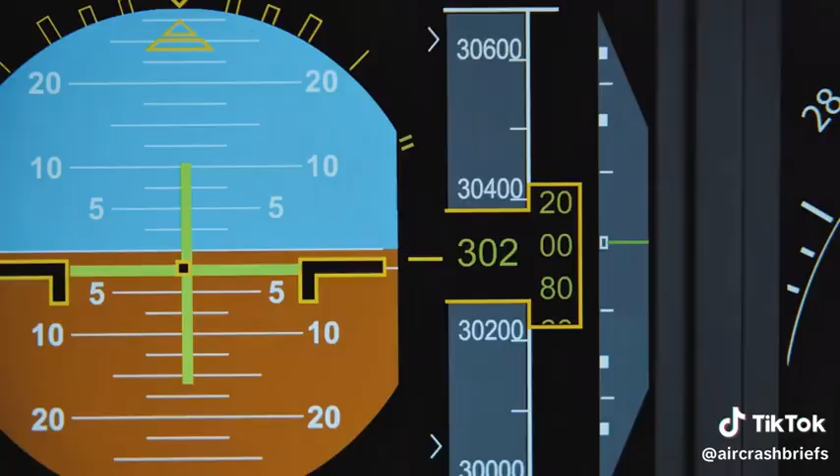The Airbus A330 is powered by two Rolls-Royce Trent 700 engines. Every aspect of flight operation is aided by advanced computers. 165 miles from Hong Kong Airport, the Airbus leaves cruising altitude and begins its descent. The aircraft is performing perfectly, and then something goes wrong. What the hell was that?

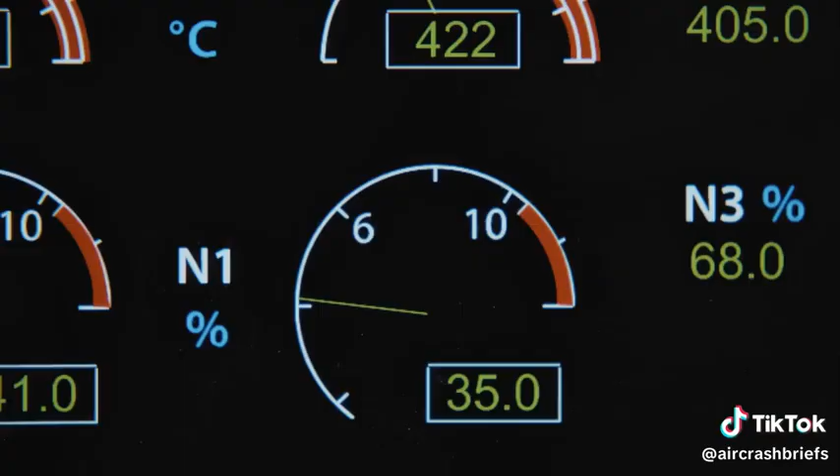The flight computer alerts the pilots to a problem. Engine 2 stalled. Plane's monitoring system indicates there's an issue with the right engine, engine number 2. Captain Waters reduces power on the engine to idle to protect it from damage, the lowest possible level while still keeping it running. It has an immediate effect. The engine noises disappear. Without thrust from the right engine, the pilots are now relying exclusively on the left engine to get them to Hong Kong.

But as the flight crew prepares for landing, the left engine, engine number 1, also fails. Engine 1 stalled. Both engines are now still running, but producing no thrust. The plane is gliding. Without thrust, they won't make it to Hong Kong or any other airport. Despite several attempts, the pilots cannot get the engines to produce power. The pilots confront the grim prospect of ditching in the South China Sea. I'm calling a mayday. Do it. First Officer Hayhoe begins preparing to ditch the plane.

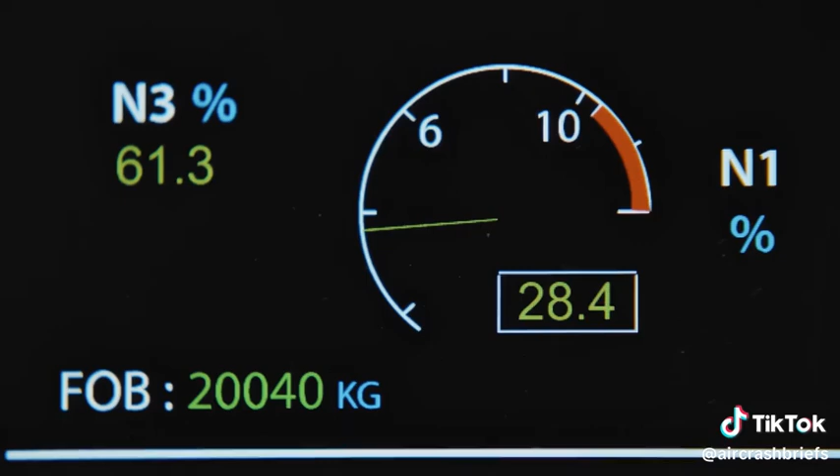Then Captain Waters gets an idea. Okay. Try slow movements. Go slowly. Just ease in fuel. Easy does it. Incredibly, it seems to be having an effect. Rotation increasing in engine 1. Captain Waters realizes that the engine won't go any higher than 74% power. With one engine working, the pilots can now attempt a landing at Hong Kong Airport. But there's no margin for error. Okay, flaps 1. Gear down. Gear down.

The safest plan is to get the plane 5,500 feet from the ground, then pull engine 1 back to idle, reducing speed and altitude, in preparation for a gentle glide onto the runway. But just 1 minute from touchdown, it's overspeed, an overspeed warning sounds, a signal the aircraft is flying too fast. They should be slowing down. Engine 1 is still running at high speed, too high to land safely. The pilots have no choice but to risk a high-speed landing on a runway at the edge of the ocean.

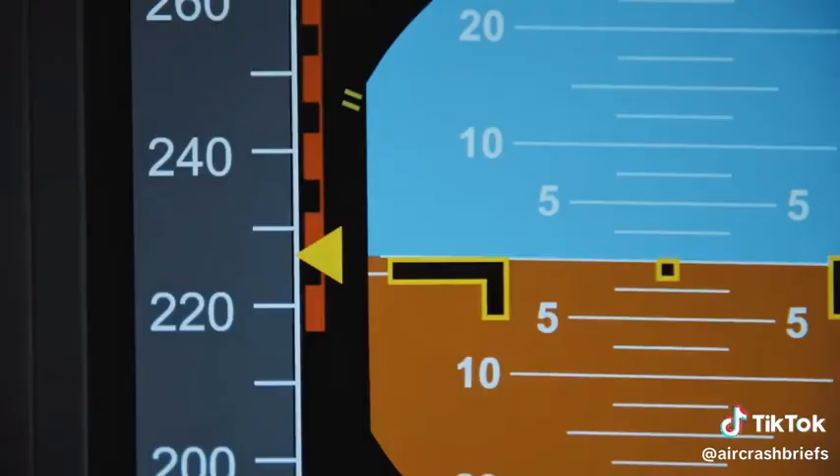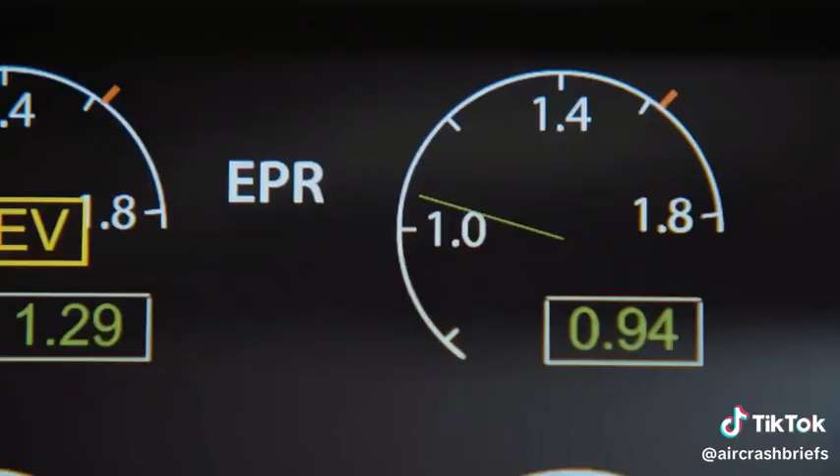Going 100 knots faster than normal, Captain Waters pushes the nose down, forcing the Airbus onto the runway. Brace. At the end lies open water. The crew deploys reverse thrust and applies full braking power to avoid overshooting the runway. No number 2 reverse. No decel. Just one faulty engine is providing reverse thrust. Cathay Pacific Flight 780 screeches to a halt just a few thousand feet from the end of the airport's runway. We made it. Nice one. The passengers and crew evacuate safely with only a few minor injuries.

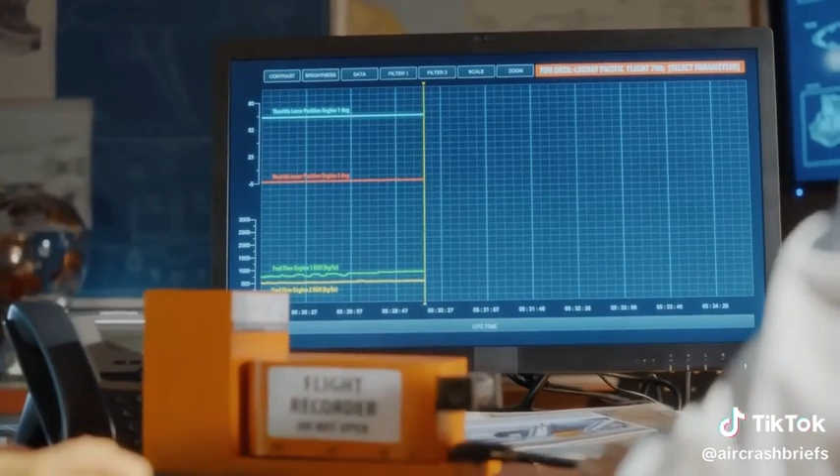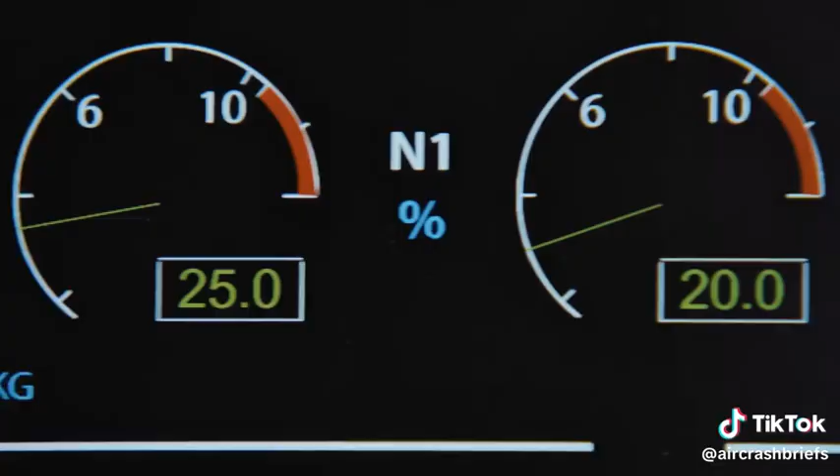Hong Kong's Civil Aviation Department immediately launches an investigation. Because the plane's Trent 700 engines were made by British company Rolls-Royce, Anne Evans of the British Air Accidents Investigation Branch joins the investigation. Investigators look to the plane's flight data recorder for answers. They start with the A330's engine functions. Stop. What's going on here? Right away, they notice something unusual. Thrust levers are moving, but fuel flow's flatlining. Right after the pilots tried to restore power to the engines by pushing the throttle up, the fuel flow remained the same. Investigators wonder if a fuel flow problem caused Flight 780's engine trouble.

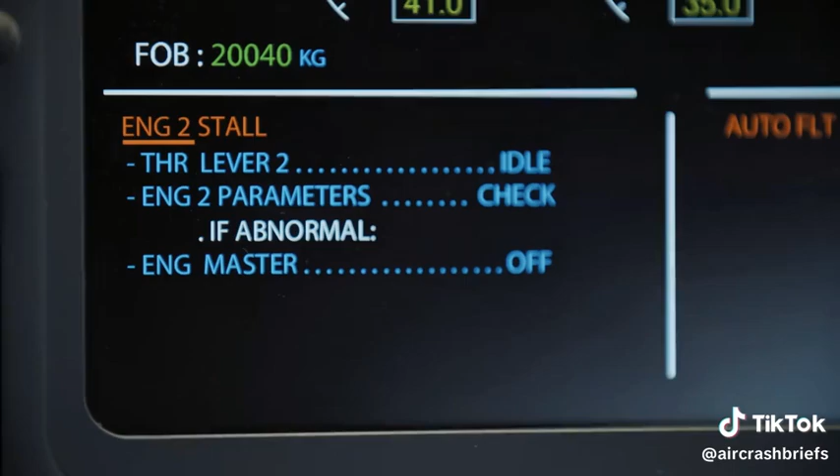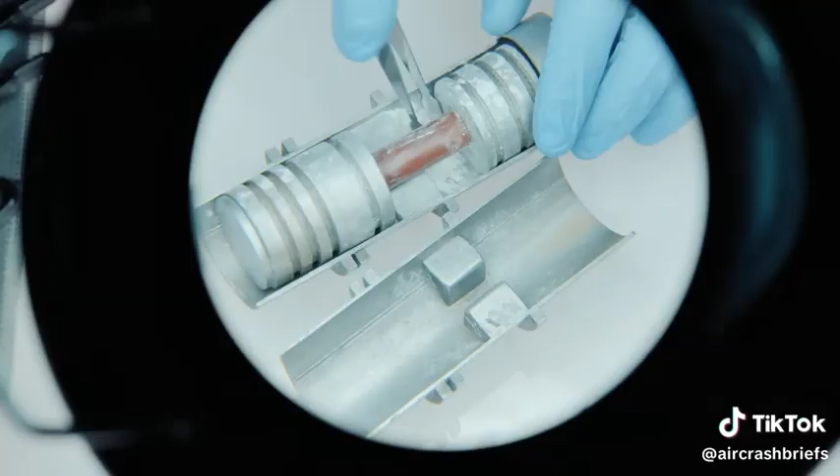Evans turns to the plane's in-depth data logs. They explain in detail the error messages that appeared on the monitoring system throughout the flight. Engine 2 control system fault. Anne Evans discovers that early in the flight, the computers detected a problem in a key part of the fuel system called the main metering valve. The main metering valve is made up of a piston that slides within a cylinder. When the pilots move the thrust levers, it increases or decreases the flow of fuel to the A330's turbofan engines. When investigators cut the valve open to study it, they find something they've never seen before.

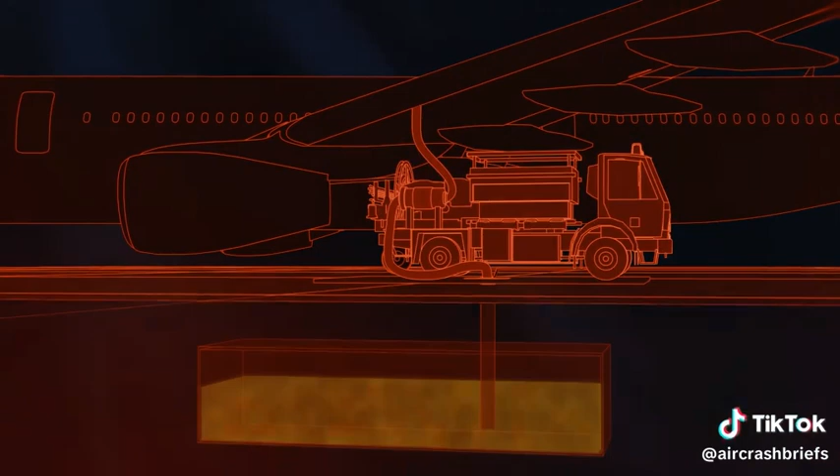Microscopic analysis reveals that the powder is a type of superabsorbent polymer, or SAP, made up of tiny spheres. The powder is used in refueling trucks to prevent water from getting into the aircraft's fuel tanks. The refueling trucks pump fuel from underground tanks and pipes through a filter on the truck and into the aircraft. If the fuel is contaminated with water, the powder in the filter absorbs it by forming a gel inside the filter. But the waterlogged gel is supposed to stay in the filter. It should never end up in the fuel.

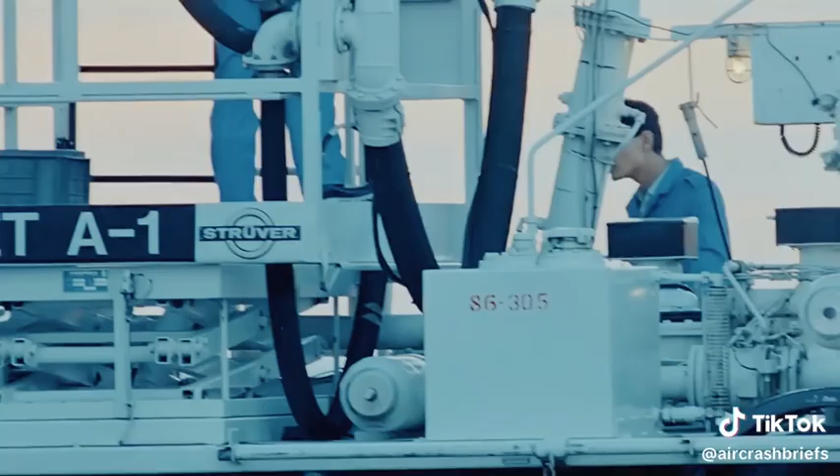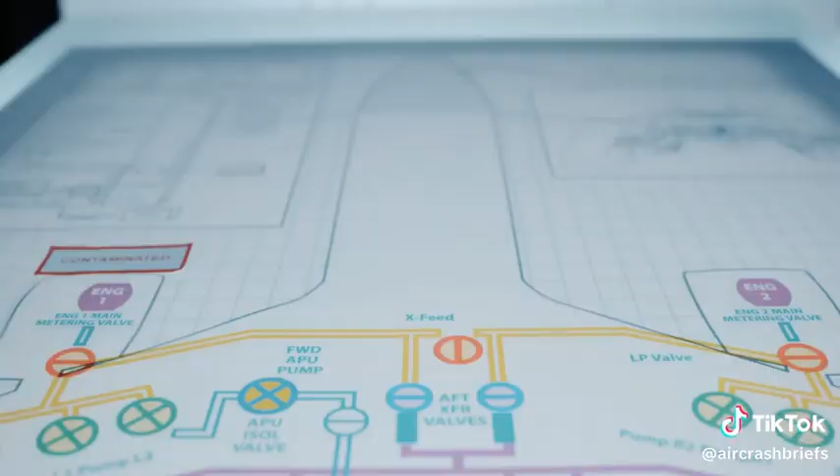Investigators recover the filters from the truck used to refuel Flight 780 at Surabaya Airport. And when they examine a sample of the filter under a microscope, investigators make a puzzling find. The powder spheres are encrusted with salt. When Anne's team conducts tests on fresh filters, exposing them to salt water, the filters collapse, just like the ones used to fuel Flight 780, allowing both the salt crystals and white powder spheres to pass through. Investigators now believe salt water collapsed the fuel filters, leading to powder contamination in the fuel system of Flight 780. But one critical question remains. So, how did salt water get into the fuel system?

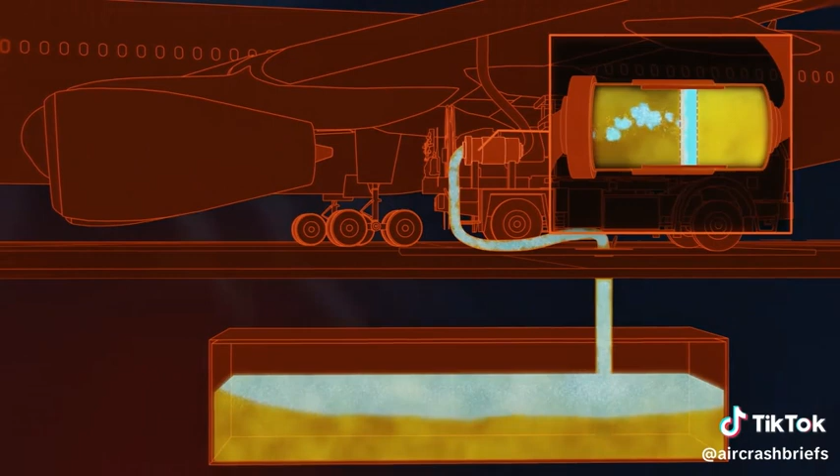After a careful review of the fuel system at Surabaya Airport, investigators make a stunning discovery. The fuel system is located close to the sea, and during a recent upgrade, the open fuel pipes were possibly exposed to groundwater. Investigators now believe they know what happened to Cathay Pacific Flight 780. The underground fuel supply, contaminated with salt water, broke down a filter, releasing a powder into the fuel. The powder jammed the metering valves, preventing enough fuel from reaching the engines. Engine 1 stall. Investigators believe Captain Waters was able to restore some thrust in engine number 1, only because its fuel metering valve wasn't yet completely jammed. Only a small trickle of fuel was getting through.

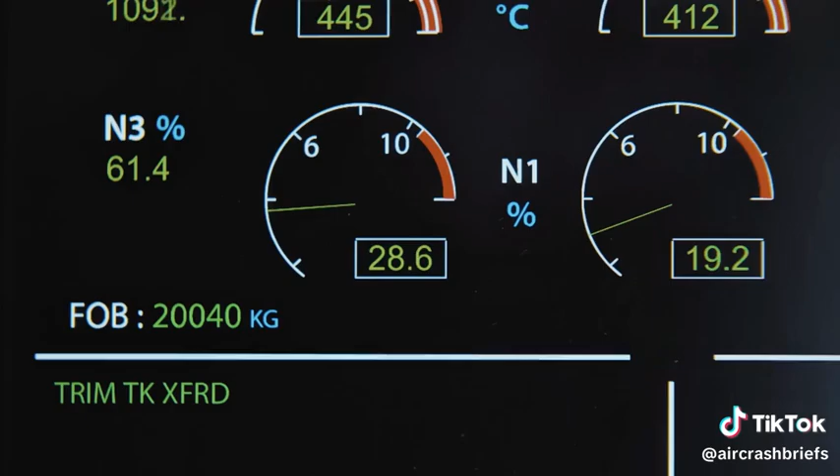Slowly, come on. Once the spheres jammed the valve, it was stuck open, forcing Captain Waters to make the risky high-speed landing. Expert piloting brought Flight 780 safely to the ground. Since the accident, there have been efforts to improve the regulation of aviation fuel handling and storage. Manufacturers have designed the filters to prevent collapse and powder contamination. The crew's heroic efforts in the face of engine failure save Cathay Flight 780 from all but certain disaster.